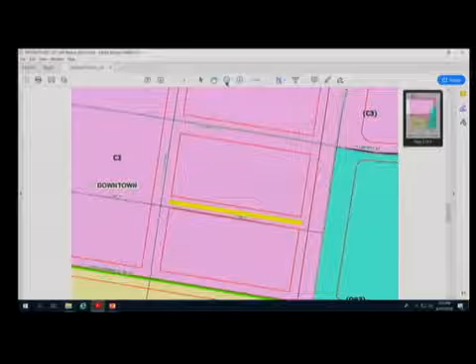And I think such things can be handled administratively by somebody else. This was part of the Beecher Terrace redevelopment in Russell, and it was recorded as Fisk Court. It was determined by the Housing Authority and Metro that it would need to go through a street name change because the plat shows it as court instead of street. Court is addressing a type of designation; I understand why it's confusing, but staff and the Housing Authority determined it needed a street name change because of the recent recording of the plat.

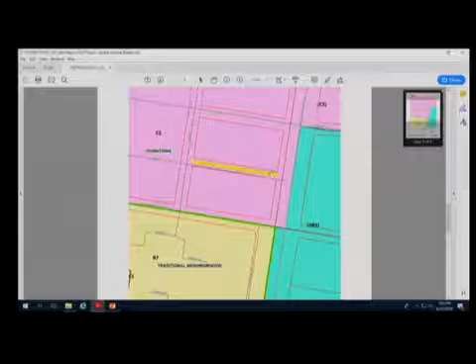Yeah, we're going to go ahead and continue with the street name change process to make sure it just gets done completely. Any other questions for staff? No? Anyone else here to speak on this case?

Okay, so our choice is either public hearing or consent agenda. Jeff, I'm okay with consent agenda. Yes, I am too. So I guess we need a motion to put it on the consent agenda for July 18th.

Madam Chair, in regard to case, I suppose I might be jumping the gun without asking if there's anybody here who wants to speak about it. Oh, I already did ask, sorry. No one indicated they did or had signed up to speak.

Madam Chairman, in regard to case Streets 19 Streets 10007, I move that we place this matter on the consent agenda for the July 18th Planning Commission hearing based on the staff report. I'll second. Okay, properly made motion and second. Any further discussion? Okay, roll call vote, please.

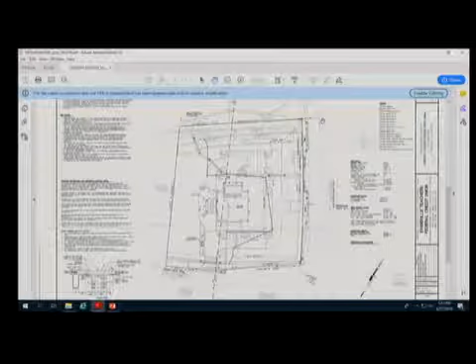So basically here we have Old Henry Road. And the applicant is proposing a one-story, 6,800 square foot bank with a drive-through. Their entrance is here off Terraview Trail and over here off the side street, which is High Wickham Place. Two entrances here. This road continues over to the rest of the development.

Pretty straightforward case, just a development plan, unless there are any questions for staff. Questions, commissioners? We don't have to change any of the general plan binding elements for this one, correct? It's just for the site. Right. Okay, is that all the questions for staff?

We'll hear from the applicant. Good afternoon. Kent Gootee with Mindel Scott, 5151 Jefferson Boulevard, 40219. I have, as we get through this, Stacy Shord with Evansville Teachers Credit Union and the architect, Russ Frederick, if you guys have any questions as we get into this.

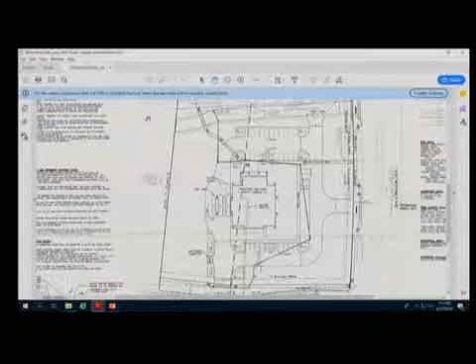Do you have anything to add? No? All right. Is there anyone else here to speak on this case in support, opposition, or other? Okay.

Chief? I'm happy. You happy with it? Jeff? Yeah, I think the plan's fine.

Madam Chairman, in regard to case 19 Dev Plan 1082, I move that we approve the revised detailed district development plan to include the binding elements as shown in the staff report, the proposed site binding elements, and I base that on the staff report and testimony we've heard today. Second? Okay, properly made motion and second.

Any further discussion? Roll call vote. Brown, yes. Carlson, yes. Lewis, yes. Thank you. Thank you.

Okay. And then where's this one go? Just with the.

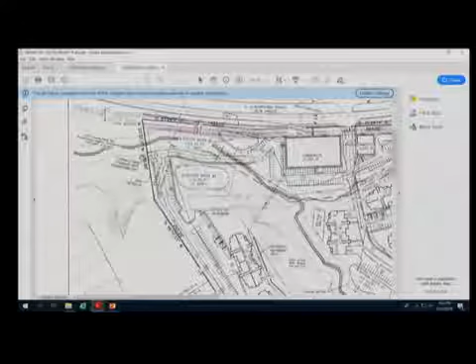Are you aware of anything that might stand in the way of those connections? Downs Farm Way has a stub and has an easement, and the binding element requires them to provide an easement. So not providing that connection would violate the binding elements, and then we have the enforcement mechanism of those binding elements.

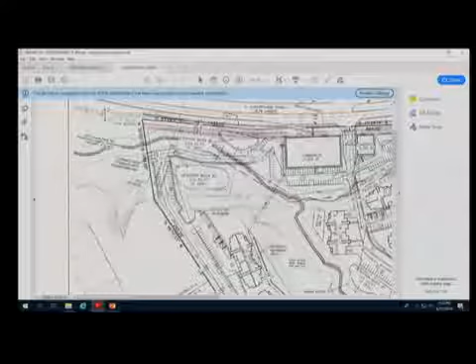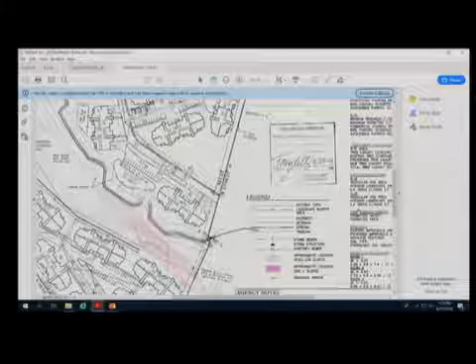They've also got stub connections here to vacant properties and here through a private access easement, and that's to provide for the facilitation of any continuation of Ferndale Road, which is further to the east of the subject site.

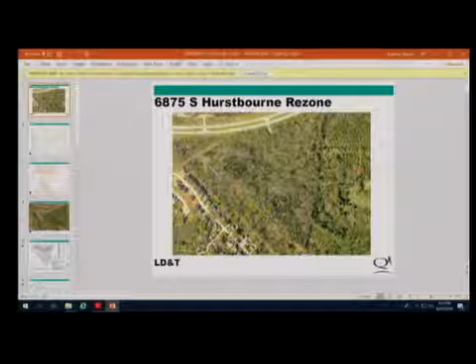Good afternoon, Ashley Bartley with QK4, 1046 East Chestnut Street, 40204. We are here today to rezone this property. Part of it, Joel said R5, it's actually R6, this little corner up here. And the rest is R4 to R6 and CN zoning.

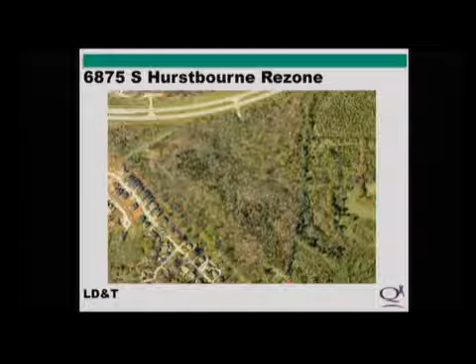We are located on Hurstbourne Parkway, just west, about a mile west of Bardstown Road. Here's the zoning map, so you can see, not that well because of the property lines, but the zoning goes essentially this way. All of this is zoned R6, and then R4 is back in here, and then here's that small sliver.

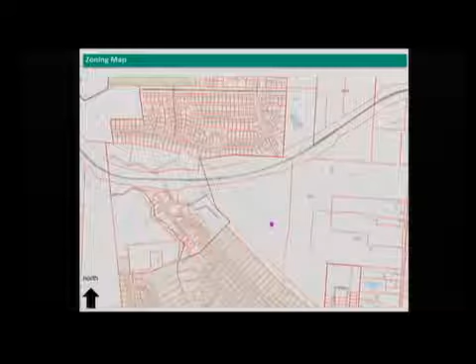Here's an aerial of the site, so you can see to the west. This is an older subdivision back in Hollow Creek, the city of Hollow Creek. And then this is Hurstbourne Heights up here. That apartment complex, I've got some photos of it, is in this area up in here. That road is already constructed. I was out there earlier this week, and they're just wrapping up on their final fourth building now.

And as you can see to the east are larger former agricultural lots that are undeveloped, that we would assume one day will be developed.

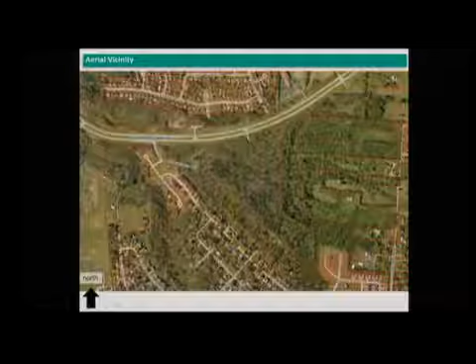Here's the development plan. The proposed zoning boundary is here, so the front would be a CN, which is the least intense commercial that is available, and the rest would be R6. And this was very deliberate based on two intermittent streams that cut through the property.

We've got this front piece and then it's kind of segmented into two other thirds over here and then to the southwest. When we looked at the project, we first filed a general development plan with nothing on it, only zoning lines. Joel said, based on the Highview plan, he didn't know if he would be okay with commercial. We came back with all residential, went to the neighborhood meeting, and heard pretty overwhelmingly that the neighbors really wanted some kind of commercial. They have no place to go get milk or a cup of coffee or a sandwich.

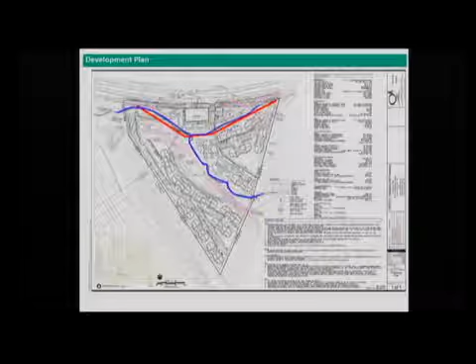I did a Google directions to the closest grocery store, which is Value Market on Outer Loop. You got to get back on Hurstbourne, come back through. So I feel like there's really an underserved community in this area that doesn't really have anywhere to go, or all the way over here to Walmart or Kroger to go to some kind of grocery store. So that's kind of the theory behind the zoning on this case.

So up front, we've got a little bit of commercial, a little over 20,000 square feet over here, 4,000 square feet here with associated parking. Got 125 units in this area, and then another 176 back here.

The layout was very deliberate. There are some steep slopes on the site, which is basically where the tree preservation area is, and then there's a ridge that runs more or less this way. So the buildings have been located in alignment with the grades of the land. It kind of builds up in this general pattern. And then we have detention facilities here, here, and here.

Here's that development now. So that roadway comes through, and then we'll curve around. I think it kind of curves and hits, and we'll come through the property as our second access point.

You can see this is the city of Hollow Creek, the older subdivision, and here's the new Hurstbourne Heights. This is where the apartments ended up being. They've got these lots still planned, not built yet. Most of these are under construction - I was out there earlier this week, and there's probably at least 3 homes under construction right now. So we can see development is kind of starting to fill in to the east.

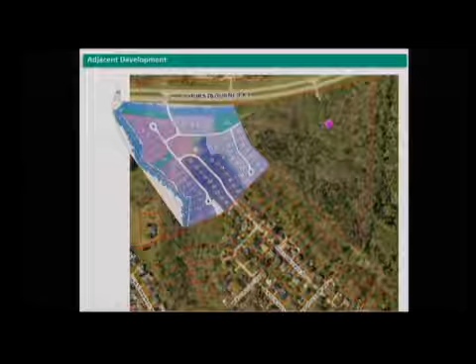Here's the plan. So that roadway comes through here, and that is shown. That was part of the approval, to provide access to the adjacent site, which is ours.

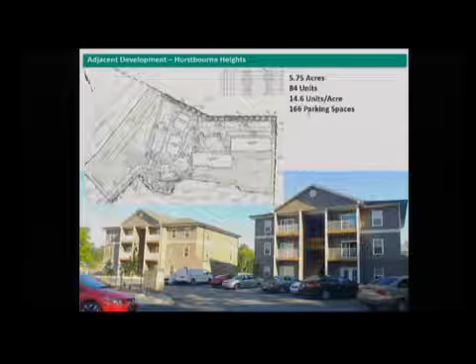Here's some photos of those apartments. They have very similar density - we have 14.69 units per acre, they have 14.6. Here's the city of Hollow Creek, older, more traditional, a little bit larger lots, and then here's the new development, Hurstbourne Heights.

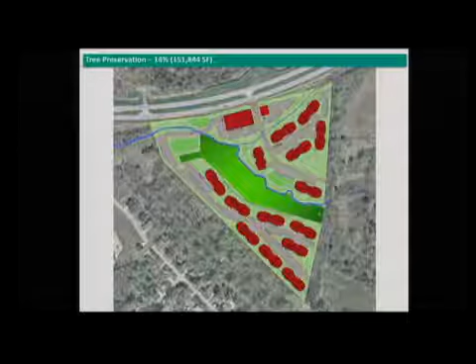We are preserving 14% of the tree canopy and will fulfill the rest of the 20% requirement with buffering. There's a landscape buffer area required on this side, and of course, parking lot trees.

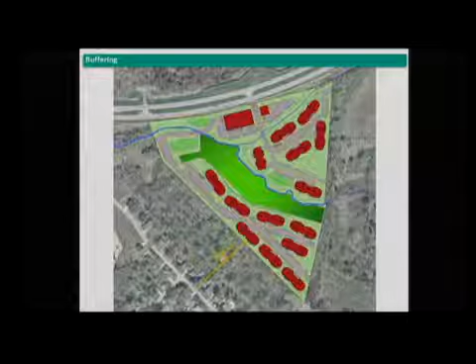We are about 430 feet from the closest single-family residence to the closest proposed building. And again, with the connectivity, we do have the roadway that comes through as a private access easement. We talked about how one day that could connect into Ferndale and provide a connection here, and this is the connection point to the west.

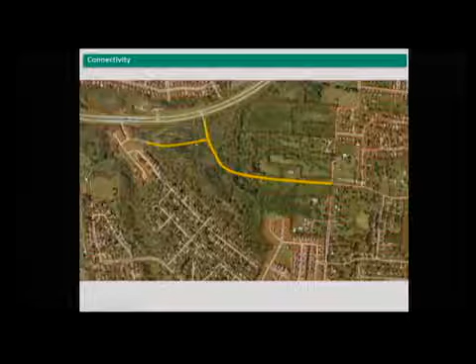Again, just talking about, here's our site. All of these single-family homes can get to the site via the existing infrastructure.

Sewers - I think we're going to talk a little bit about that today. I know one of the adjacent property owners is here and has some interest in where the sewers are going. These are all the sewer easements, so the sewer stops and stubs into our property here, and all of these parcels are on septic currently. So the sewer will be coming through the property to serve these to the east, which is why we have all of these easements that stub over on this side.

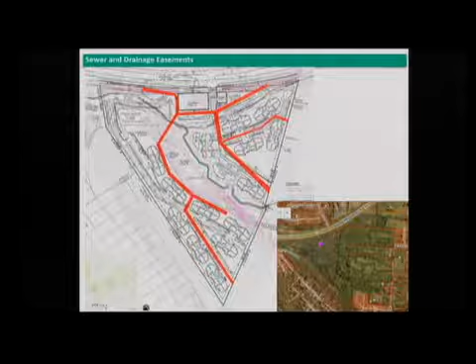There was some concern about elevations. Of course, we're at a rezoning with a very conceptual plan at this point, haven't looked at any grades of sewers, so these are again slightly conceptual. We know that we need to have these easements to the east property - they might shift slightly, and MSD has signed off on the plan. And of course, when we get to construction documents, it's possible the plan will change, and we will look at things closer then.

That's all I have, if anybody has any questions. Questions for the applicant? Chief?

Ashley, what I'd like you to do between now and the public hearing date is run this plan by the fire department. Over there at that commercial building, you have almost a hairpin or U-turn. That may or may not present a struggle for a large fire truck making that turn, and there may need to be some revision to your plan to accommodate that. I'd rather get all this dealt with at one time rather than you having to come back for a plan change later on. So if you could do that for me, please. Will do.

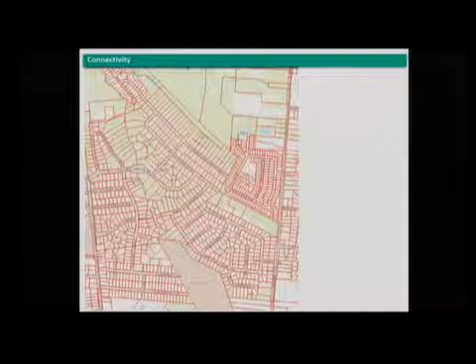Jeff? Maybe I need a full-size plan, or can you zoom into the access point on Hurstbourne, maybe from the development plan. Joel - we've got a right, left, and dedicated straight out of the development.

You show a left, a right, and a through, and one inbound, and I'm guessing it's not 24 feet that's labeled on the plan for a 30-foot easement. Yeah, the access easement is 30 feet, but then the right turn lane and the in - are you saying that access easement needs to be wider at the entrance? Well, and I don't think 24 feet is the correct dimension. Oh, no, it's not, that was left over. Those are all 12-foot lanes.

But then I guess my other question would be, do you need the through? Are you going to build it as if a through may be there and stripe it off? Well, that could probably be a straight left because obviously the sound wall is on the other side - nobody's going straight. Good call.

So you might update the plan to show the correct dimensions at that area, and if the easement needs to widen out to accommodate all 3 lanes plus the sidewalk, because it looks like you're only doing the sidewalk on one side. That's right, yeah.

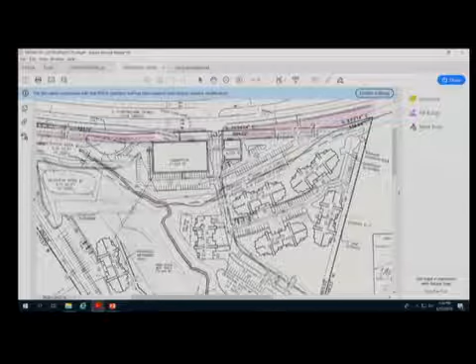I'll probably get David back up here in a second. So, Kent Gootee, Mindel Scott and Associates, 5151 Jefferson Boulevard, 40219. We've been going MSD because Mindel Scott represents David Dries, and we've been trying to figure out the best way to serve the property. I think what Ashley and I may have worked out is to come here and run this easement up a little bit closer.

We can't run it parallel exactly because of the LBA that's here until this property is rezoned. So if we can hit somewhere in here and then come down, their sewer is down here, so we'd have this easement right here, come up and hit somewhere probably where this road is, then that might be satisfactory. We don't have enough room in here unless we redesign the plan, and I don't know that the developer would be willing to do that. So food for thought, I guess. We'll see if David... sorry to do this in front of you, but we hadn't had time.

So, right there. If you were right here, that's probably better than what's proposed now, but that's just going to cause a very deep sewer. If we go first, we're going to have to build a very deep sewer through this ridge, which I don't know why we would build a sewer through a ridge anyway. I don't know why it helps the applicant.

I don't know why it helps MSD. If we go second and they come in, then we're also going to need to build a very deep sewer to connect, because their sewer only goes up to not very close to the property line. So we have a very deep sewer, and we'd have to tear up their parking lot, come through the middle of their parking lot. So if we go first, we're kind of in bad shape.

Yes, I think what Mr. Dries was commenting about, let's see. Because I like perpendicular lines, I came and turned this sewer, and in doing so, chased the sewer up the hill rather than stayed with the contours. So I'm happy to turn this stub easement and extend it this way, which would therefore lower it. Right now, it would be exiting the site around elevation 631, and it would be more about 615 up this way. I don't know if that would satisfy him, but it would make more sense for the elevations, and as you've heard, MSD is okay with that location as well.

Okay, David, do you understand what she's saying?

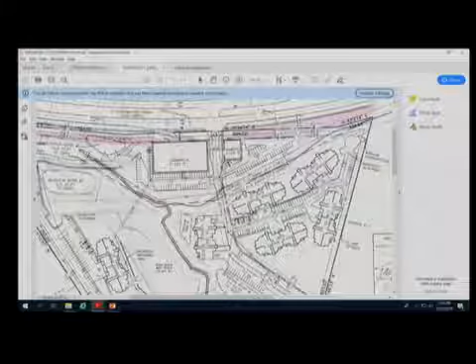All right, Commissioners, we're charged with setting a public hearing. Do you feel like this is ready for a public hearing, or does this need to be worked out further? I'm fine with the public hearing, but I think there's a few things they need to tweak before the meeting. I sense a willingness amongst all parties to come up with a good solution, so I think between now and whatever hearing we set up—and I expect it to be a little bit farther out, given holidays and full dockets—they'll have time to do that. So I think setting a date is good.

August 1st. Does August 1st give the applicant time to work out these issues with Mr. Dries? Okay, we'll set the public hearing for August 1st then.

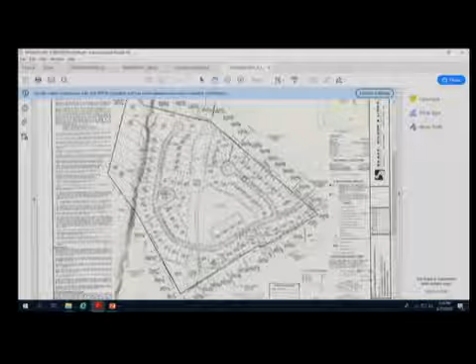Again, Joel Dock, Planning and Design Services staff. This is a major preliminary subdivision for the creation of 72 single-family residential lots on roughly 45 acres of land, resulting in a density of about 1.5 dwelling units an acre. The site is west of U.S. Highway 42, about 1 mile south of the county's northeast boundary. The subject site abuts R4 zoning districts on all 4 sides, 3 of which are developed for single-family subdivisions. On its western boundary, it abuts the Garvin Brown Reserve, which abuts the Ohio River.

That's a property owned by Riverfields, Inc. Two stub roadways enter the property, here and here. Sidewalks are provided throughout the development with sidewalk or walking trail connectivity to adjacent subdivisions, and there's on-site detention and roughly 11 acres of open space.

No action is being requested today of the Land Development Transportation Committee meeting. The original time frame for this project was to be on the Planning Commission public hearing for June 20th. Not all agency approvals had been received in time to get notice out for the June 20th hearing, so we didn't notice for that. Instead, between staff and the applicant, we found it best to put it in front of the Land Development and Transportation Committee first, even though it's not required of a standard R4 subdivision, and at least get out there the technical issues.

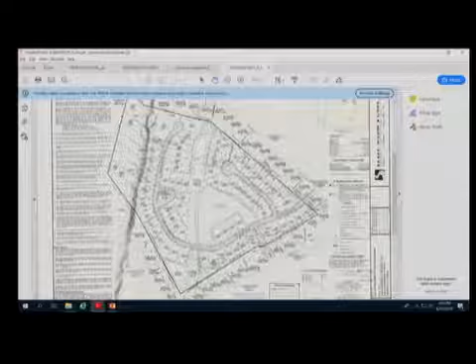Thank you, Joel. I'm Pat Dominic with Sabak, Wilson, and Lingo, 608 South 3rd Street, 40202. I am representing the Breakers at Prospect LLC, the developer on this proposal. With me today is Stephanie Gillison in the audience. She is the applicant, the developer of this.

There's a lot of history here. I think Joel has gone over a lot of that, but I want to mention up front, it was our intent to give the public as much opportunity as possible to express their feelings about this case, and that was the reason for the dual meeting. So I know we're taking up your time this afternoon. I sure hope it doesn't get to this evening, but I appreciate the attention you're giving to this. It's important. There's a lot of very technical issues that have gone back and forth on this, and I think it's important that you get a thorough understanding of the subject before you.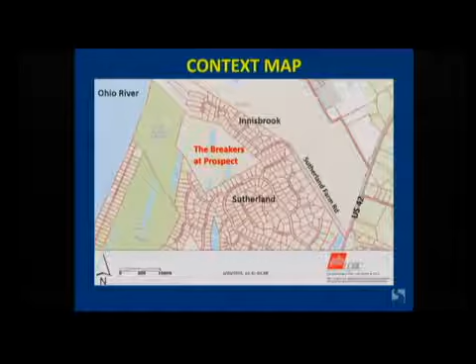And there are the two stub streets that were planned when both Innisbrook and Sutherland were developed, obviously to serve this property.

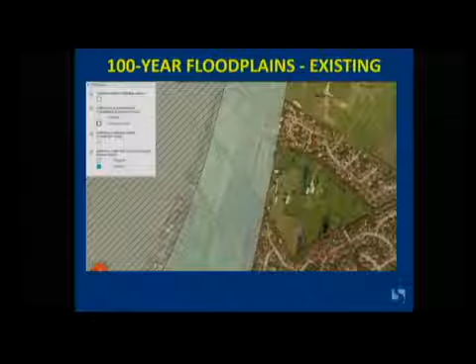A couple of things I want to get out of the way. The floodplains, as we're near the Ohio River, I want to confirm there is a high bluff along the river in this area. A lot of that lowland, as well as the Garvin Brown Preserve and some of the other properties to the north and south, are all within that 100-year floodplain. None of the development, none of the homes, we're not asking for any construction permits to occur in the floodplain. Even the proposed 100-year floodplains, which have not yet been adopted, are on record at MSD. You can look county-wide at the new mapping, and even under that scenario there's very little change in the floodplain. So none of the development we're proposing occurs in the 100-year floodplain.

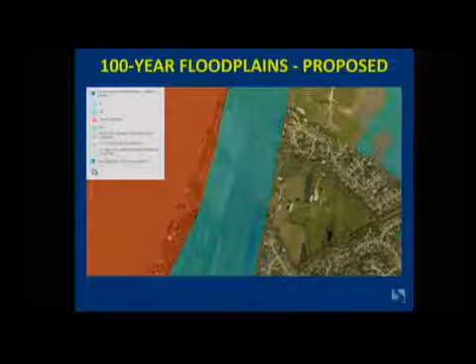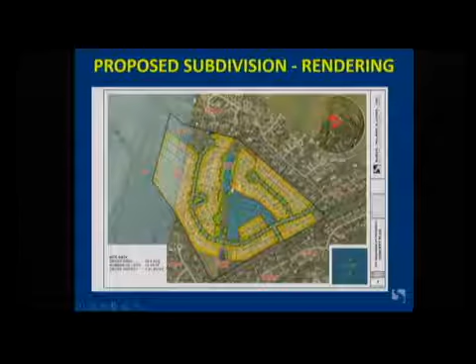But I did want to talk about some of the environmental things that affect the layout. Joel had mentioned the wetland delineation that we did have done on the property. There are a series of jurisdictional wetlands located in linear strips, and these are very commonplace along the Ohio River, commonplace along the Garvin Brown property, and up and down. They form these linear strips of land and hollows where hydric soils and vegetation have developed. There's also a beautiful lake, beautiful, holds water all year round, even in dry periods. So we've got some jurisdictional wetlands here.

There is a large wetland area right here. This formed almost a drainage corridor prior to the development of Innisbrook and Sutherland. This was sort of a linear drain system that just ran through the landscape. It is our intent to preserve the pond.

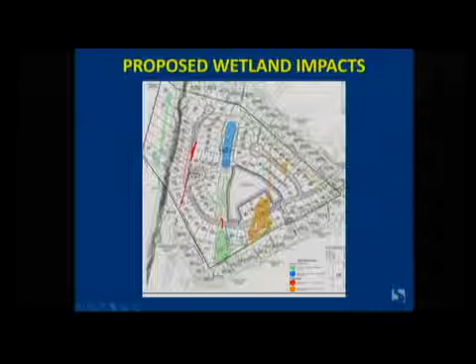There's this linear wetland strip, wetlands in the floodplain, and a large wetland area down in the southwest corner of the property. The brown areas were also identified as wetlands, but the Corps deemed those to be isolated, so no permit is required to construct or impact those. The limits of our disturbance are fairly minor, and we can work that through the Corps' nationwide permit program.

The main issue on this subdivision from the beginning was stormwater management, and I'd be remiss if I didn't talk about some of the background elements to that. We have extremely flat terrain, somewhere on the order of 0 to 3% slopes. Most of the drainage on the property actually goes to the lake and wetland areas on the site—not a lot of it drains off that we can tell.

As a result, there is very limited outfall capacity. Both the Innisbrook and Sutherland neighborhoods do have outlets that tie into this property, but downstream through those neighborhoods, the capacity of that system is really limited. Combine that with the fact that further downstream, in the Shirley Bass and Duroc Avenue areas, there's an existing neighborhood that has experienced flooding repeatedly. So there are a lot of downstream issues we had to concern ourselves with.

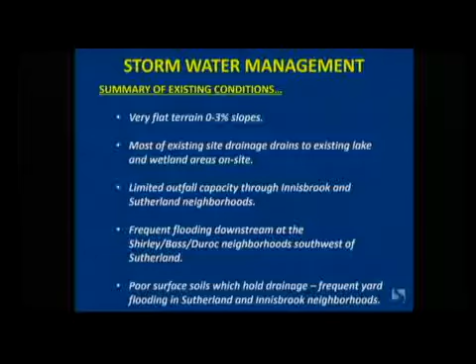And lastly, very poor surface soils. We have a geotech report I can talk about in a minute, but I have probably about 24 photographs of ponding water in people's yards. This surface layer is sort of a Robertsville-Scioto soil series—it's almost plastic, and when it gets wet it just holds water. Because of the flat terrain, we get a lot of rear yard flooding. So those are the constraints on the property.

At the time, I was very clear in expressing to the neighbors that our preference would be to take all of our stormwater to the Ohio River, and we had good reasons to think we had a chance to do that. One was a private drainage easement our property had with Riverfields—when this was originally dedicated, there remained a 15-foot drainage easement and I believe a 12-inch pipe there, but it was never dedicated to public use. It's a private drainage easement that just served the two bulk properties.

There was a second alternative, also involving Riverfields and the Garvin Brown Preserve: since this easement ran right through the middle of their property with a pipe in it, what if we eliminated that pipe, put in a new pipe serving our property, and moved the easement to the north end of the property, out of the way, instead of running it through the middle. That was option number two. The third option involved an adjoining property owner.

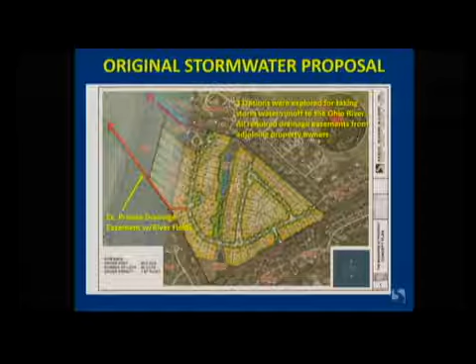Our owner, Stephanie, made very serious, substantive proposals regarding acquisition of a drainage easement in all three cases, but those offers were rejected. So without an outlet to the river, we are looking at how to handle our stormwater on site, again without impacting the Innisbrook and Sutherland neighborhoods.

So the first part of our stormwater proposal is the 3.5 acre lake that sits in the middle of the property. We are only obligated to provide 3.3 acre-feet of storage per MSD's normal detention requirements, but we are providing 8.9 acre-feet—almost 3 times as much. We are trying to hold back as much of our stormwater as we possibly can. The lake also provides some amenity value and some water quality benefits that I'll talk about in a minute.

The second part of that proposal involved infiltration. We have a lot of experience with stormwater infiltration in Louisville—it's been part of MSD's Green Manual for the better part of 4 or 5 years now, I think.

So there have been a lot of projects that have successfully infiltrated stormwater. What we have reserved is after our drainage enters the lake, and the sediments, suspended solids, and any nutrients that are part of that are sufficiently diluted, they are discharged by pipe into an infiltration area. We have a couple of details to talk about how that might work.

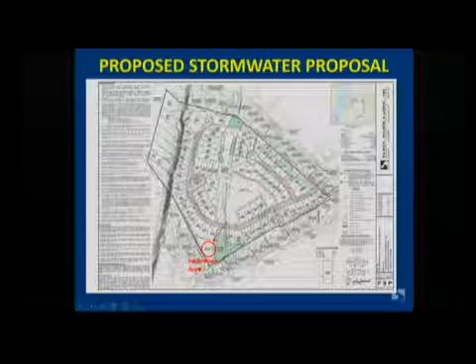The geotech report that we got indicated very favorable results. We go down about 20 to 25 feet and we get a very consistent, almost 20 inch per hour infiltration rate. Those are excellent rates. MSD standard is only a half inch per hour, and we have very porous soils along the river.

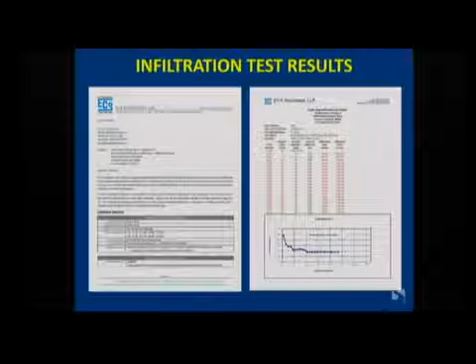That's almost indicative of the way the water companies, on their website, talk about riverbank filtration being a green approach to potable water supply, in that the sand and gravel in the earth serves as a natural filter. We feel the same way is going to happen with ours.

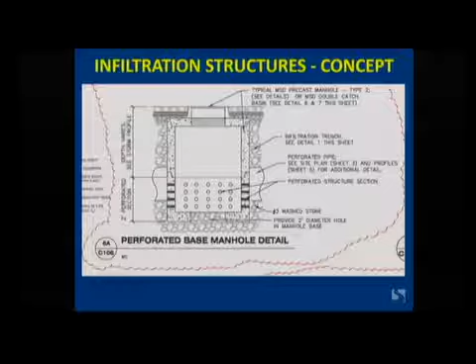There are several techniques. We don't want to settle on this at this point in time — I think it's premature before we have road grades, inlet structures, and everything established. But one option is what we call a perforated manhole, where we have an intake pipe from the lake. The bottom will allow the water to filter out slowly, and we'll have a pipe and another connected inlet and then another connected inlet. It's a system that allows the stormwater we're collecting to access the fine sand and gravel subgrade.

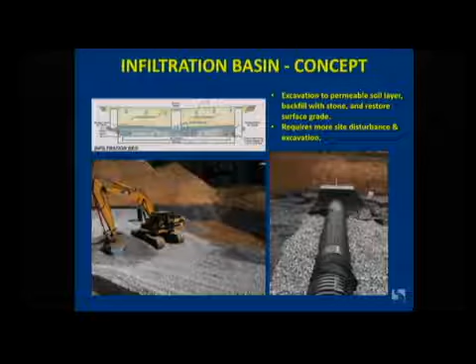The second option we have is to do an infiltration basin. We've done more of these downtown in urban conditions than we have in subdivisions, frankly. These involve a lot more disturbance — we're actually excavating a deep pit, if you will, that gets down to that sand and gravel layer. We backfill with stone and then restore the surface grade, so you don't see anything on the surface, but the water is allowed to infiltrate in there and gradually dissipate.

I did want to talk about the wellhead protection zones, because this is what was discovered after we had MSD's approval and Public Works approval, and is what has created so much interest over the last week or so. We are about three-quarters of a mile from one of the wellheads. We are in an area 2B, and I believe — the water company can certainly correct me if I'm wrong — that the 2B zone is defined as a 10-year migration, where something entering the surface at that point in time will take about 10 years to get to that wellhead.

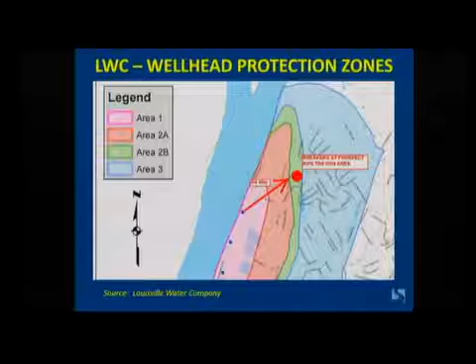These are our water quality commitments. We expect to work very closely with MSD and the water company and any other state departments that need to sign off on this. But it's important to note that every time we've done an infiltration feature like this, we have some level of pre-treatment, where the water is somehow treated before it goes into the subgrade. The pond is a beautiful source of pre-treatment, in that we allow the suspended solids and sediments to filter out, and we allow any nutrients that enter the system to be sufficiently diluted.

Above and beyond that, we're prepared to offer deed restrictions that limit harmful herbicides, fertilizers, and pesticides, and to have that become part of the HOA documents that would affect any of the purchasers. In fact, this is very similar to a restriction that was placed on the rear of the Sutherland lots that abut the Garvin Brown Preserve.

We expect to enter into a long-term maintenance agreement with MSD. The HOA will do that, and that will include monitoring both volume controls, to make sure that the runoff is actually being contained on site, and also that the water quality aspects of our features are working properly.

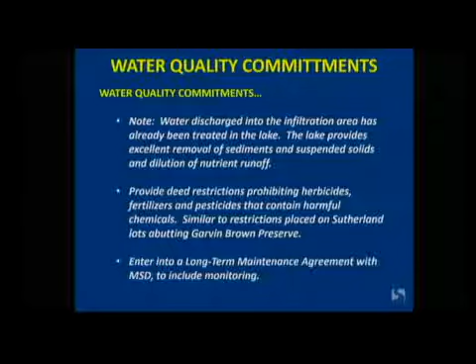We think we put something together — a neighborhood that, based on the houses we're doing, will fit in beautifully with what Innisbrook and Sutherland have, and it's an excellent use of the property. Lastly, we will be asking your approval of this subdivision plan for 72 lots on 49 acres. We have no variances or waivers, and the zoning is appropriate for what we want to do.

Are there any questions? No? Okay.

Kay Ball with the Louisville Water Company.

Would you prefer MSD to go first? Okay. Do you need it zoomed in or anything? Sure. And they all have copies as well.

Hi, it's Kay Ball, Louisville Water Company, 550 South 3rd Street. As you can see by this drawing, this development is within the wellhead protection area. And on this drawing, you can see the line that depicts the tunnel, and the dots are the actual collector wells. The wellhead protection plan is mandated by EPA, and the whole purpose is to protect the groundwater supply and the contributing area of that water supply.

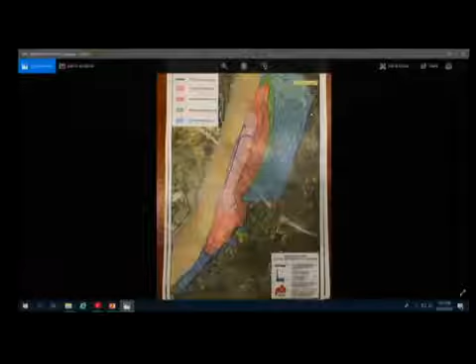You say you need time to evaluate what's being proposed. Are you talking a matter of days, weeks, months, or years? Well, we need a plan first. They do not have a plan. We saw some examples of something that they can use. We need to know what they are planning to install. So we need to have a final design, so we can evaluate it. Right now, we don't know.

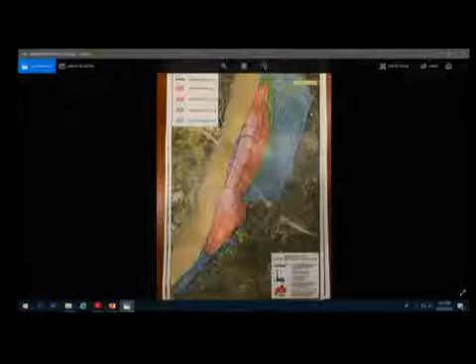Good afternoon, Madam Chair, members of the committee. David Johnson, representing the Metropolitan Sewer District at 700 West Liberty Street.

I'll just give you a briefing of what we've worked with the developer on. As Pat pointed out, when they originally came with the plan, we had all intentions of this drainage going directly to the river — that's really where we wanted it to go. We just thought that was the best solution. Mr. Dominic worked with some adjoining property owners, Riverfields and others, and was unable to obtain proper easements to allow that water to go directly to the river. So they went back to the drawing board.

They came back to us and said, well, we've got these outlet pipes that leave from our site in different locations rather than directly to the river. And we expressed some concern about that. As he pointed out, the people down on Bass Shirley and Duroc Avenue have extensive flooding issues down there. We're very well aware of that, and we've actually developed a very preliminary design to help eliminate some of that flooding, but due to funding issues, we're not able to build that one at this time. It's about a $1 million project, so we cannot construct it.

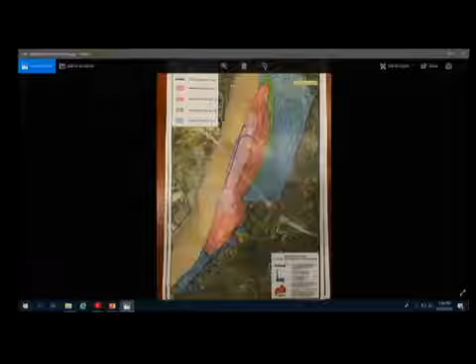How many acres is it? You know, not off the top of my head, no. Thank you. Thank you. Thank you.

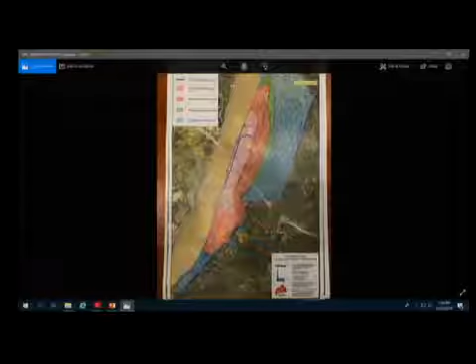I am the developer. Please come to the microphone before you talk so we can get your name and address. Stephanie Gillison, 5964 Timber Ridge Drive, Prospect, Kentucky. I'm the developer, and if you have any questions for me, I'm happy to answer anything.

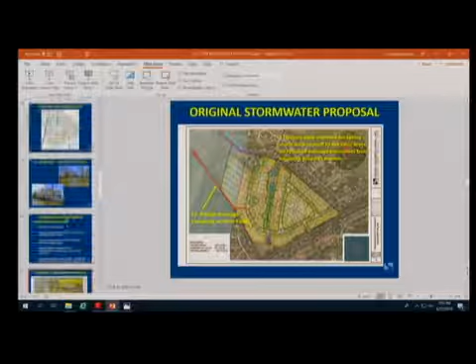I wanted to show a few details about the property that you may not know. Right here it was an old railroad, built back in the late 1800s. That railroad was the original railroad that fed Prospect, made Prospect what it is today. It was supposed to go out towards Westport Road and finish there, so Prospect would actually have been built out near Tinseltown if that had happened.

That railroad became a dam for this wetland right here. So that wetland has developed over the course of over 100 years. That wetland, of course, feeds the aquifer as well as the other wetlands within this property. So the ecosystem that's been developed here was established over 100 years ago.

They're going to talk about how they can mitigate that and how they're going to change the drainage. But ultimately, they are going to impact the aquifer no matter how they construct on this site. That aquifer is, of course, next to the Garvin Brown Preserve, our wetlands that feed our clean water over there at the wellhead.

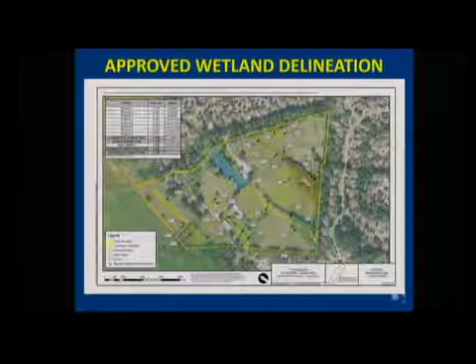That's all I have. Any questions? Thank you. Mark Jackson?

My name is Mark Jackson. I'm the president of James Taylor Jacob School Neighborhood. We are here because we are downstream. My address is 7700 River Road, Prospect, Kentucky 40059.

Because we are downstream, I've been in the area since 1962. I've seen the changes taking place out in the Prospect area. We didn't have the water issues we had until the Sutherlands were built, and it was all natural water flow.

Now we're getting flooding through our area, as everybody on the opposing side, MSD, and the water company has also said that there are issues with our drainage. Before anything is approved, as far as I'm concerned with our neighborhood, we really need to look at the downstream water flow. With climate change, things are getting wetter, and the prospect of us being more drowned in water, with more concrete, asphalt and houses being built, would affect the Sutherlands first, which would also affect us.